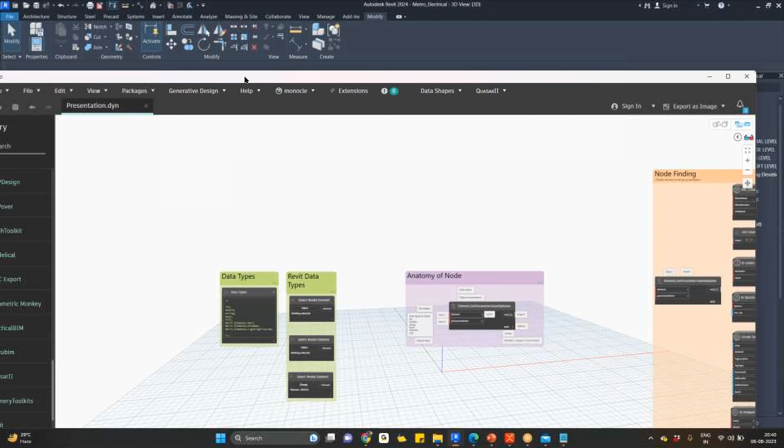This is the Dynamo interface. You don't need any external installation. Whenever you install Revit, it comes with the Revit installation.

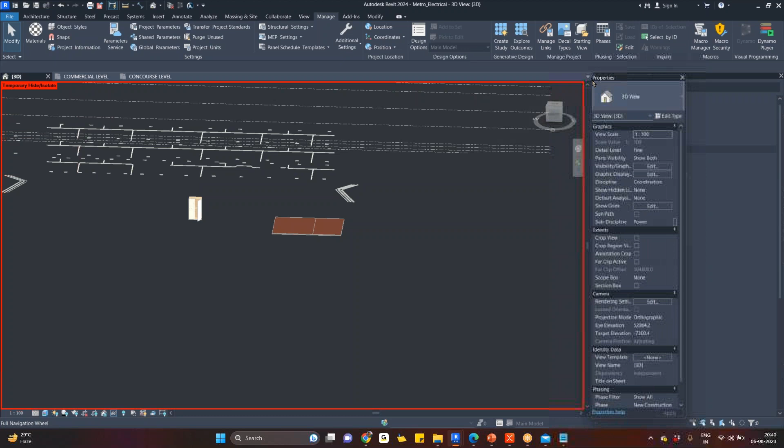You don't need any... okay, fine, let it sit here. Let that sit here. Let me drag that here. Let's come in.

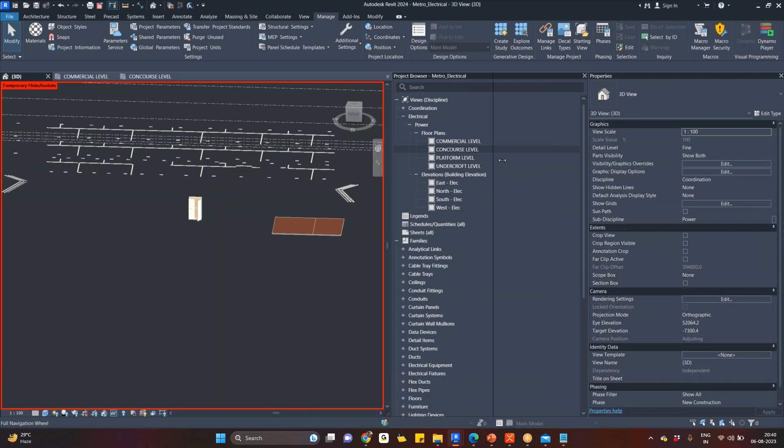So that's there in the manage tab, in the visual programming panel. We have a programming panel also that's called macros. Generally we call it macros, but in terms of coding, for the developers, it is programming. This is programming and this is visual program. There is a difference.

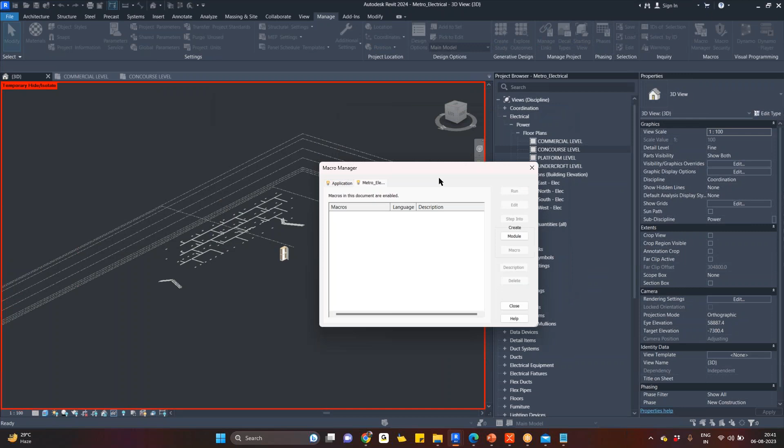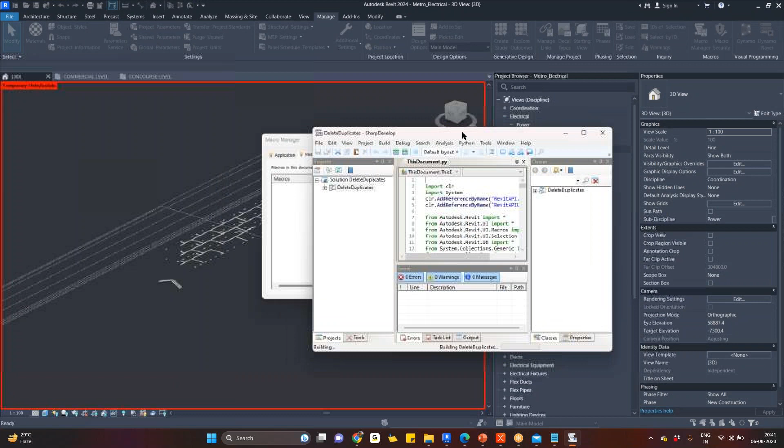When I click on macro manager, a pop-up comes, and when I click on create module, it asks, if you're a programmer, which language do you wish to go with? I can say I know Python because Python is a very easy language. Let's say I want to delete all the duplicates which are overlapping each other, so I'd write 'delete duplicates' and a description. Click OK. Now it opens another hidden application, which has opened in another screen. Let me drag that - this is the one, like SharpDevelop.

So if I want to write any code, I can write it. My content is like 'delete duplicates'. If I don't know how to write, I can use ChatGPT, like OpenAI artificial intelligence. I'll ask ChatGPT: act as a Revit C# add-in developer, I need a code to delete the duplicate elements like lighting fixtures. I just want to check - by mistake I copy pasted in the same locations, but I don't know how to delete those. Could you please help me?

So there are some ways to ask, in a very polite way, or else very angrily - you can ask anything. There are different tones to ask, different ways to ask. If you ask in the right way, it will definitely give you the right code. Or else, if it's giving you the logic, you have to customize here and there and get that done. So this is for the programmers.

But when it comes to the engineering field, if you're a BIM modeler or coordinator or BIM designer or Revit user or just a designer, you don't have any coding experience. That's the reason Autodesk had the idea to release visual programming - this is a programming to play with the macros. You need some language, but even though you don't know any coding background, at least knowledge, still you can play with the tool and automate something. It's called Dynamo, simply put.

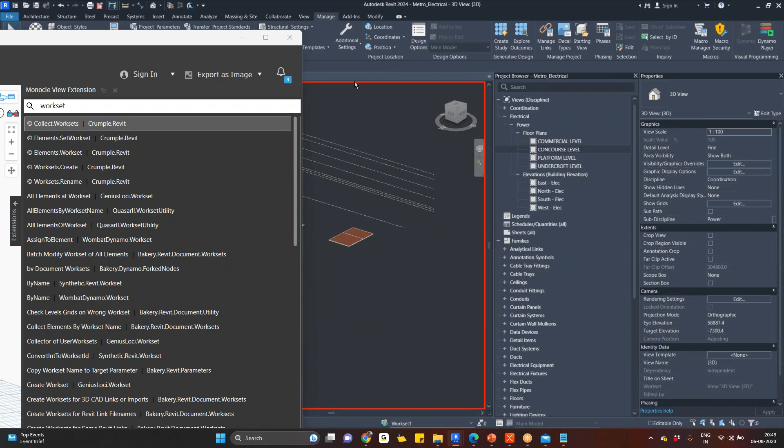So this box is saying it's like workset one, shared levels and grids. So here, era walls, it is a name. Era lighting fixtures, it is a name, but these are not the names here.

Autodesk dot Revit dot DB dot workset dot, okay so what are all those? It's called dot notation. I'm going to explain you in today's session what dot notation is. It's a very, very important concept to learn and understand.

Erase all the drawings, let's say okay I'm done with this. Collect worksets, no, whatever, element dot set workset. So what it does, if I get some elements and connect the workset to it, all the elements which I've connected to this workset will be applied successfully.

So for example, if there are any ducts, I can get the ducts and connect them to the duct workset. If I have any walls, get all the elements and connect this to this, and select the workset and connect this to this. So all the elements will be set to this particular workset.

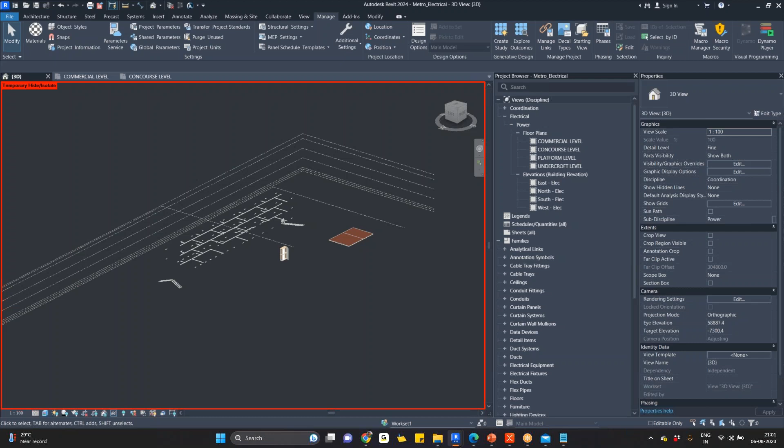If you notice this green color text, the green color one with a plus symbol, the zap symbol, and the question mark next to it, we don't have any methods over there, any actions over there.

Creation and a query. Creation and query. Go whatever, like creation, action, and query. So these nodes will help you to create something.

If you don't have anything in the model, and if you want to create, like I want to create a loft, I want to revolve something, I want to create a union, or else, okay, I want to create a sphere, I know some sort of points.

So when I hover the cursor on it, next to the text, a pop-up shows, saying 'fit a sphere as close as possible to the input points.' If you connect any points to it, it will understand and create a sphere.

Simple, by center point and radius. If you connect a center point, and give the point information and the radius, it will create a sphere again. Okay, so by 4 points, if you connect 4 points, it will create a sphere. So this is how it is exactly working. It is creating something.

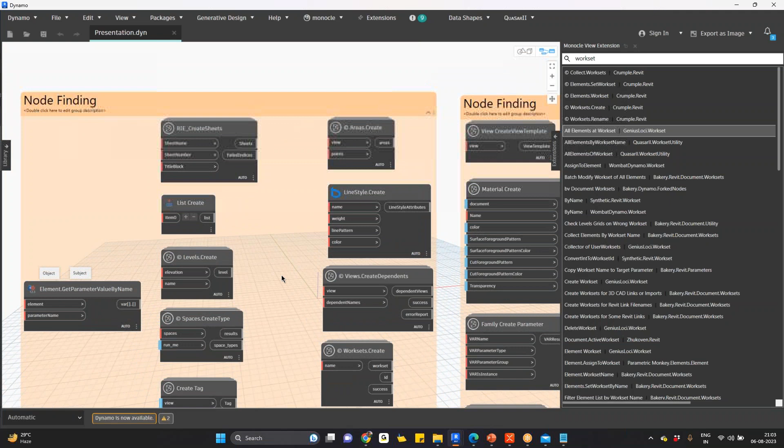Okay, so the node finding. Here we have a dot, here we have a dot, but here we don't have a dot. Here I don't have a dot. Here I don't have a dot. Here I don't have a dot.

There are few methods. So if you are asking something by putting a dot next to it, which won't work at all. So there are four more different strategies to get the nodes exactly you're asking for. Those four you'll be learning in the training part. This is the first node finding.

So once you find the node successfully, this is the easiest concept, to be frank. But when it comes to connecting the inputs, here - this has two inputs, this has three inputs, this has only one input. Very clear, these have two inputs. Oh my goodness, 1, 2, 3, 4, 5, 6, 7, 8 inputs.

If you connect something wrong, one input wrong, then this node won't work. What does it mean? Even though you have that node in your script, if you don't know how to connect the right inputs, what is the use of having those nodes in your Dynamo? Understand, connecting the inputs is really, really important. So how do you exactly connect all the inputs?

Very important stuff to understand - you have to go through the data types concept. Any input that is expecting something won't go beyond this: either it is expecting an integer, either it is expecting a double, either it is expecting a string or boolean or null, or any element, whether it's a wall or windows or lighting fixtures - it could be anything. It is expecting something, and these are called data types.

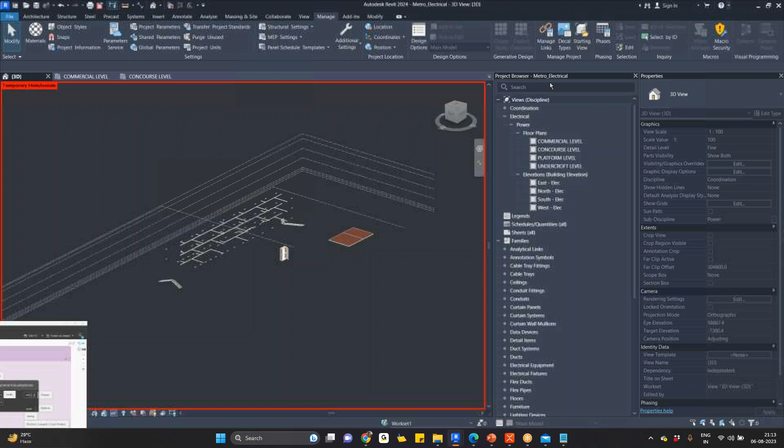Oh, so it's expecting an element. No, let me connect an element. Let me connect an element and select the model element, and get the cable tray, and I want to get the length information - length. Okay, what happened? So that is a string - no, let me type a string, my second hint. I'll type 'length' and connect this to this.

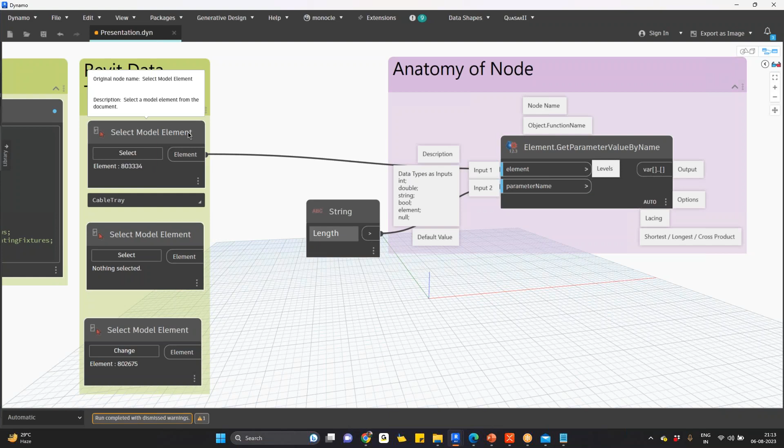So it's giving you 4760. If I want to get n number of elements, I'll connect select - I mean this is singular, I'll use select model elements instead. I have another node called select model elements, so I can select n number of elements and connect the elements to this node here. Simple. So this is the way you're supposed to understand the inputs.

There are n number of inputs again here. Oh, it's asking for a view. It's asking an element - what is that element? Oh, so in which view do you want me to tag? What are the elements to be tagged? So where are the tag locations? You have to get the points. Here, the logic is I know the element, but I don't know the points - how to get the point.

Very easy, for example. I have an element here - I have a light, I have another light here, and another light here. So by using some techniques, I'll get the center point of each and every light. Now to place the tag, I need a y value like 100, and from here to here, the x value again 100, minus 100, and again 100, minus 100, 100 minus 100. So now I want to create a point here.

So by using some nodes, I'll create a dummy point, and these points are going to be connected to this tag location. Simple. So you should know how to create the tag points from the base of this center point.

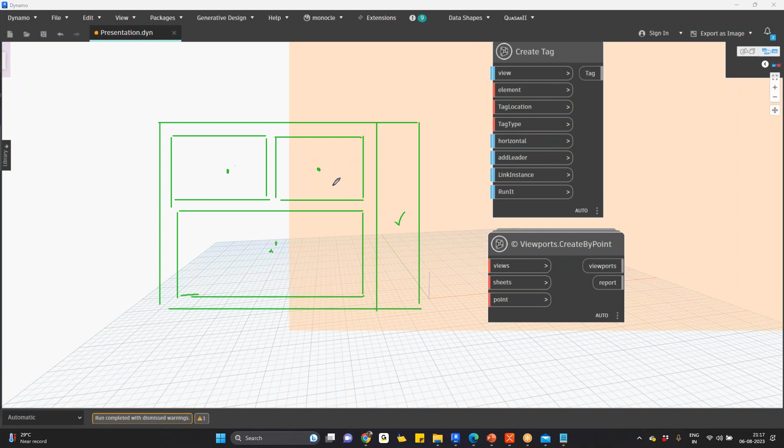So how do you create these center points? There are different strategies you can use to place the points and connect those points. Connect these 3 points to this, connect the 10 sheets to this, and connect the 30 views to this. Simple - it will place the viewports for everything.

Worksets.create, Views.create dependents. So when you connect a view and dependent names, how many dependent views do you need, and what are the names of it? If you want to create a line style, each and every input which is expecting, it is very clear.

I mean, if you understand in a kid's mindset, not like an engineer. If you're learning any tool, you should act like a kid, because everything should look new to you. We especially train people like spoon feeding - until you understand the concept, we don't leave you. Learning should be like a highway, not like a dirt road, not clumsy.

Now the node finding, and the dot notation concept. What do you mean by dot notation? Element.type name, element.get type, element.get type, element.element type, element dot.

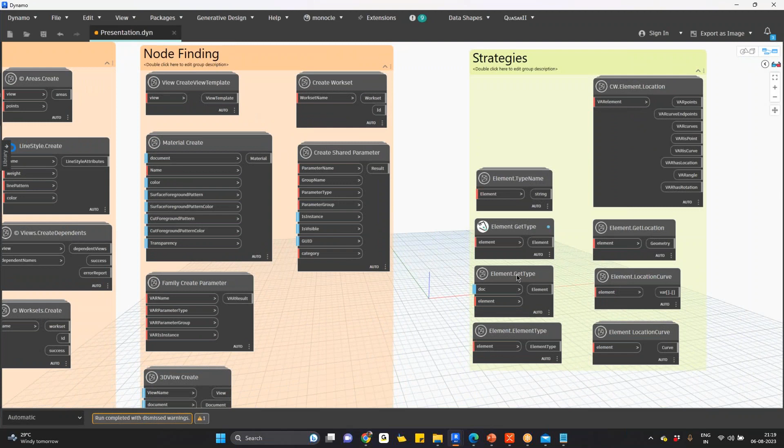So what is this? If I connect any element to this, it will return the type name. If I connect the element to this, it gives you the type name. It means for every single node, we have at least an alternative node - alternative nodes.

In the node finding concept itself, we have different ways of finding nodes, and there is a process called alternative node finding. Once you start finding, you understand what the data types are, and you understand the node behaviors - node states, I'll explain you.

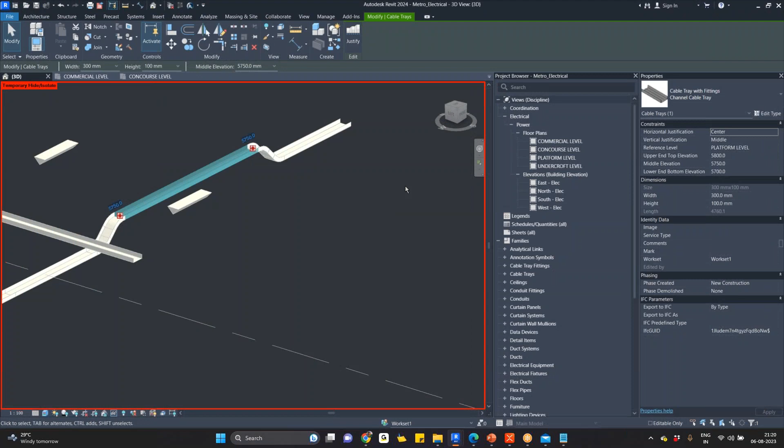The dot notation is nothing but - most people get confused. So when I select a model element, select the tray, Object.Type. Let me connect this to this.

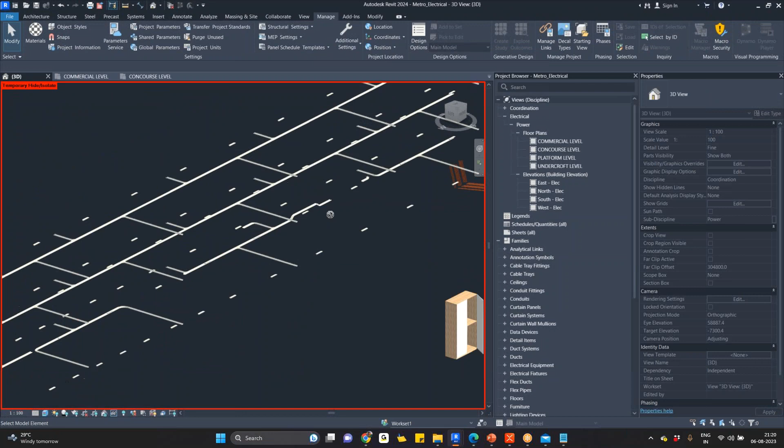It is saying Revit.elements.unknown element. Oh, is it? Select model element. Let me select - Revit.elements.floor. Okay, now it's saying Revit.elements.floor. Is it? Let me draw a wall, select the model element and connect this to this - Revit.elements.wall.

So the dot is nothing but - I have a dot here, another dot here, I'll be having another dot next to it, and another dot next to it. So what is this called? The dot notation strategy - dot notation strategy.

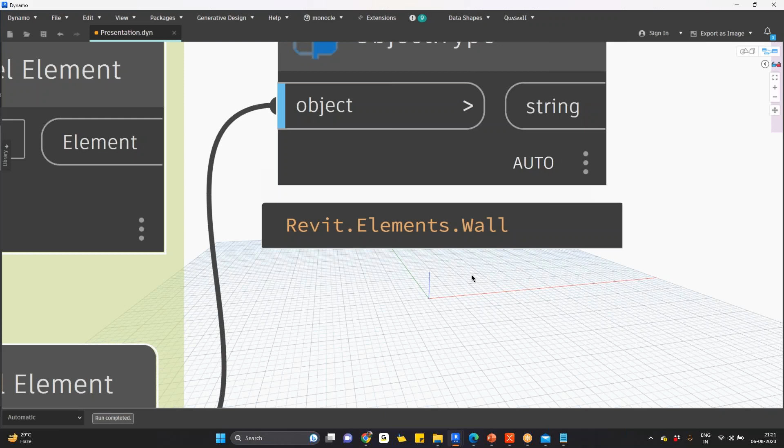Dot notation is a very important concept, and all the concepts I'm explaining here in just 30 minutes - node finding, data types, and some other stuff - each concept actually needs 2 hours to explain properly. In just 1 or 1.5 hours, you can't understand the entire secrets behind Dynamo.

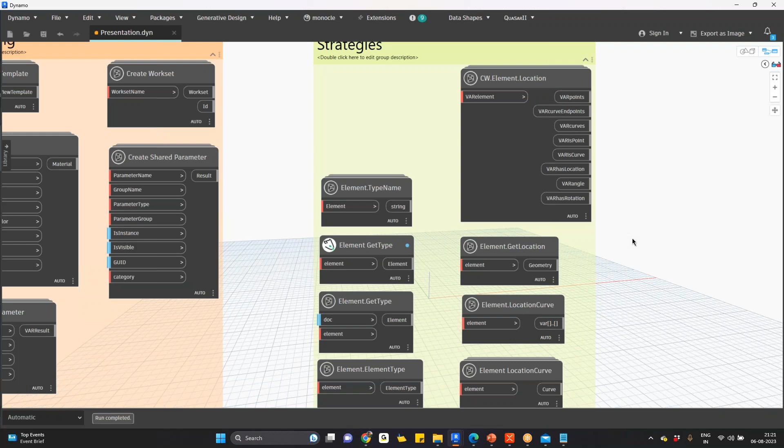But I just want to explain you everything, what you have and how to start yourself with the basic understanding. Well, the dot notation - these are like alternative node finding. If you have something, let me mute everyone.

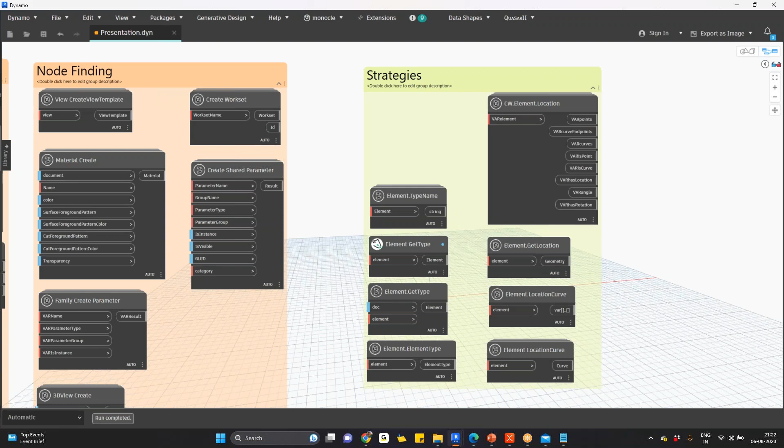If you already have some x information in it, but you want to extract some of it, like 1 of x, 2 of x, 3 of x, or 4 of x, you have to go in detail.

In that case, I will be using a dot notation strategy. Let me show you a simple Revit API model, like a language model API. Someone asked me just 30 minutes ago, what is a Revit API? API stands for application programming interface. For this Revit application, there is a programming interface, not the front face. So what we are playing with is a UI, user interface.

We are playing with a Revit UI, but the developers play with a Revit API, application programming interface. Our UI is completely different, and their UI is completely different. It's not called UI - they don't have images, they can't see the lines, nothing. But still they can program something. So that is called Revit API. For us, it is a Revit UI. So you are Revit UI users, and now you are going to become a Revit API user.

I am using 2024. When I click on 2024, now it shows me the code, the entire code of Revit, to develop a Revit application.

If I dump all these namespaces into a single application, I will be the application developer for another application, something like Revit. I'll create something and write it. So I can create my own application and dump all the code into that. And I have another application, similar to cloning - I can clone the same Revit application and name it something else. Understand?

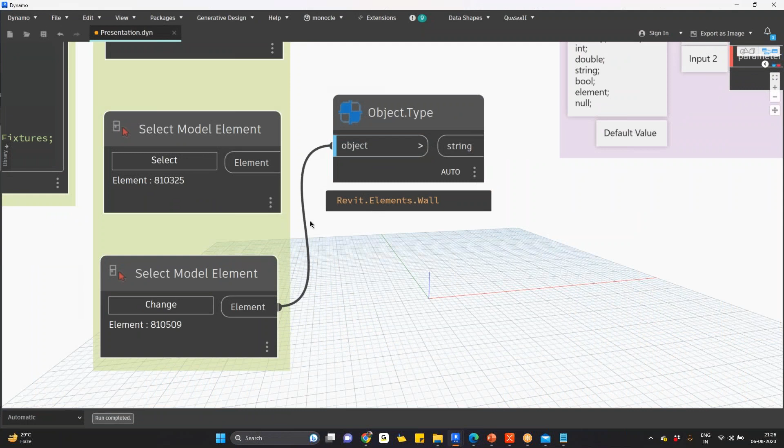Element class - again, if I want to play with a cable tray class. When I click on a cable tray, where is it coming from? The Electrical namespace - it means they have segregated things. It's nothing but like Revit.Elements.Wall, coming from architectural stuff. Revit.Elements.Floor, also coming from architectural stuff.

When I connect this to this, it's coming from MEP stuff, and it shows as an unknown element. There is a reason why it shows unknown element - these inputs are called, I'm sorry, application specific data types. It is Revit data types.

Now I hope you understand every input. If they are not connected properly, that's fine. If you connect the right inputs, it returns the actual value. If not, it is expecting something and you couldn't understand properly, and when you connect something wrong, let me show you how it acts.

This is what - my name is a node. I have a node called 'my name is a node', and that is expecting three different inputs. If you connect these three inputs in the right, correct way, it will work very, very perfectly. It's called an active node. So now let's see what it is saying.

I've been waiting for you to bring me gifts. Let's see what you are going to bring. Gifts are nothing but inputs, so it needs some help. What does it mean? It needs inputs. If you connect the right inputs, it's saying that you're a genius. You understand my inputs and connect them exactly as I was expecting. The node will be happy and it returns the right value, the right output as you are expecting. What if something is wrong? You understood like two inputs, and you didn't understand the third input.

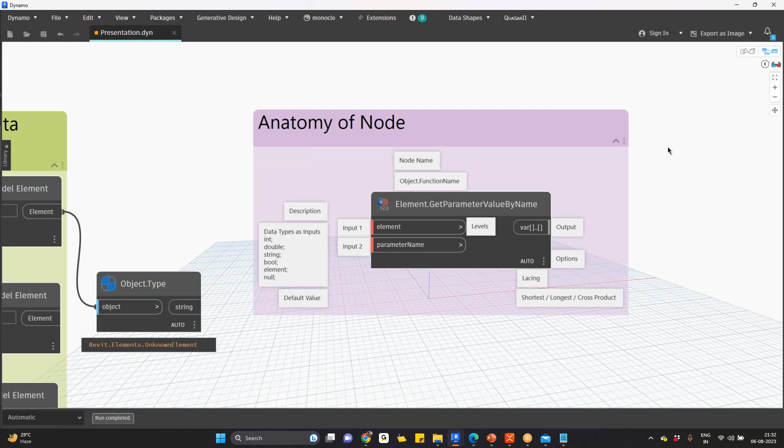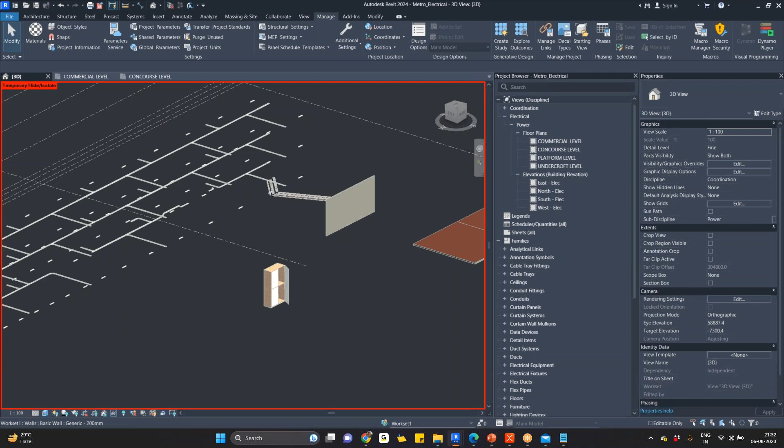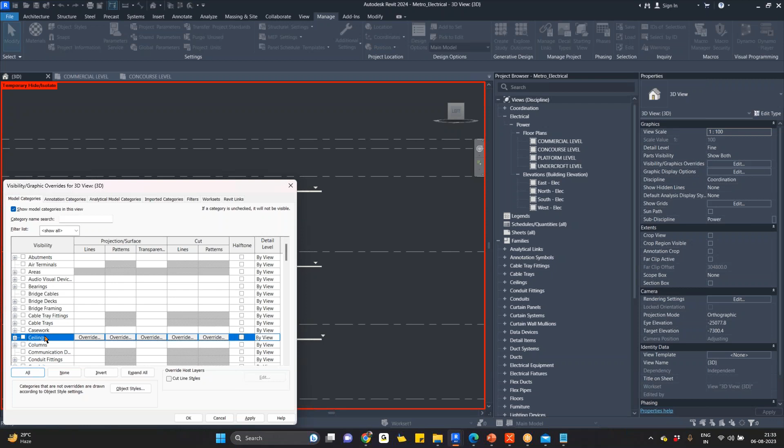Let me show you simply. I have placed three different nodes here, and I want to play with Select Model Elements. Let me see what's happening—I'm expecting to see something here. Let me just get only the cable trays. I need only the cable trays. Select model elements—let me select only the cable trays. I selected all the cable trays here, so I'm just asking to select this.

I'm asking to get all the length information of this, a string, like what we have done before. Now I'm doing it with the number of elements. Sometimes what happens when I connect this to this—okay, fine. Huh, what's wrong?

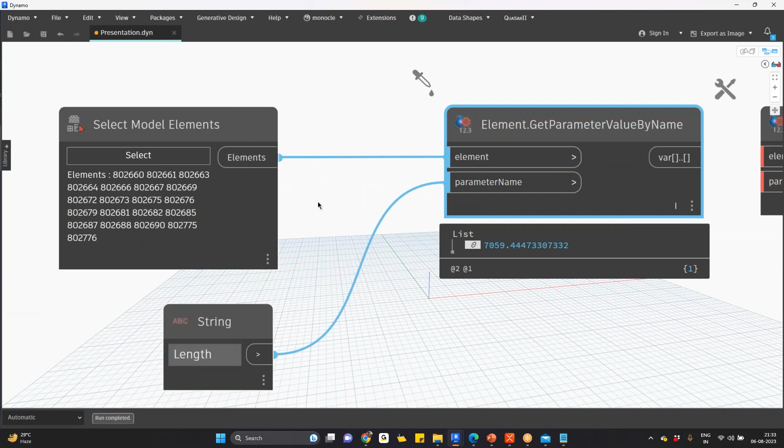I have 66 elements, and it's supposed to get 66 outputs, but it isn't returning that. I don't know the reason. Let me try with some other node. Oh, it got 66 items.

Very clear, even this is element.get parameter value by name, and this is also element.get parameter value by name. What's wrong here? When I connected the same thing, it showed only one output, but here it's showing 66 outputs. It means for all the elements, it's getting the length value, but not for the first one. Why?

This is called lacing. That's called lacing.

Lacing is one of the most dangerous concepts in the entire Dynamo. There's another one, like a villain. In every programming language, we have villains for sure. This lacing is one such villain. If you don't know how to handle him, your data will be gone, seriously gone. Your hero will be killed, just like how you're killing your own projects. So it will be exactly the same. He is the first villain.

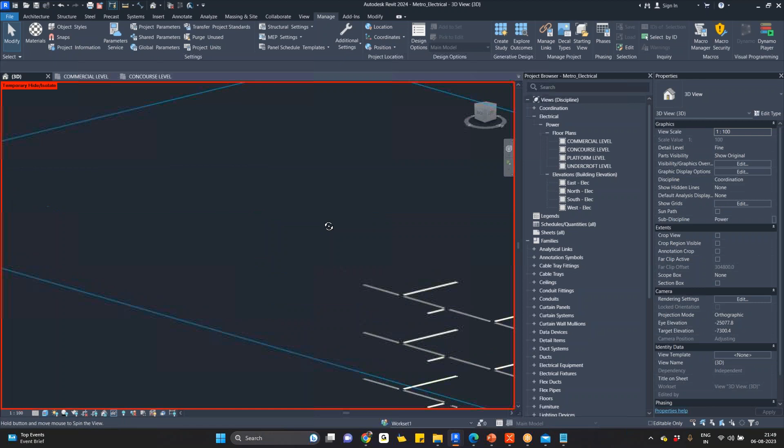Let me show you - select VB, select everything, I can see everything. Let's say select this light - select the light, oh very small light. So, very small light, and I'll say Snoop selection. This is the properties palette.

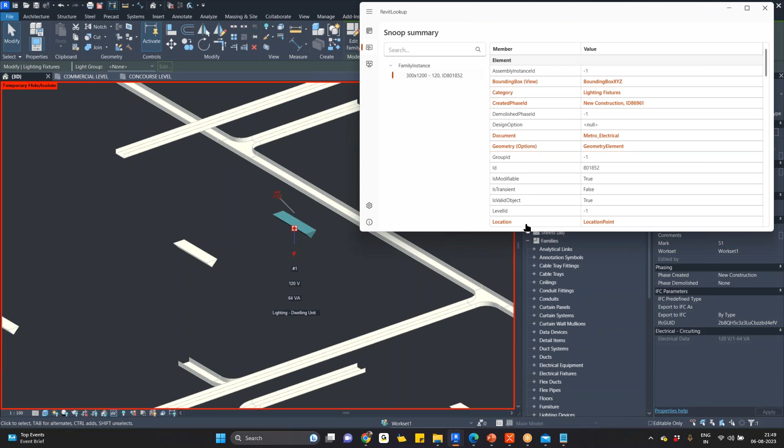Okay, now if I want to get the name of this, if I want to get the ID of this, let me give you the hint - element. In Dynamo, how we are using dot something, like element dot location. As I explained before, element dot location, element dot name, element dot something - the same thing is happening here.

Element dot ID, it returns this. If I'm asking element dot level ID, it will say at which level it is. Element dot location, it will give you the XYZ values. When I hit enter and look into this, I have an XYZ value information here. So element dot name, oh this is like 300 into 1200 into 120.

I can see the properties palette - okay, this is the family instance, and this is the ID of it, 801852. Where is the ID? 801852. So element dot parameters.

When I put a dot next to the element and type parameters, it will give you the parameter information. So, is the element pinned? No, not pinned. Is that element able to be logged? Yes. Has it been assigned with something? Yes. So which is the work set here? Every single piece of information I have here.

Not only this, even this has around 50 extra parameters maybe. Then you said we only have 5. No, this is not the complete data.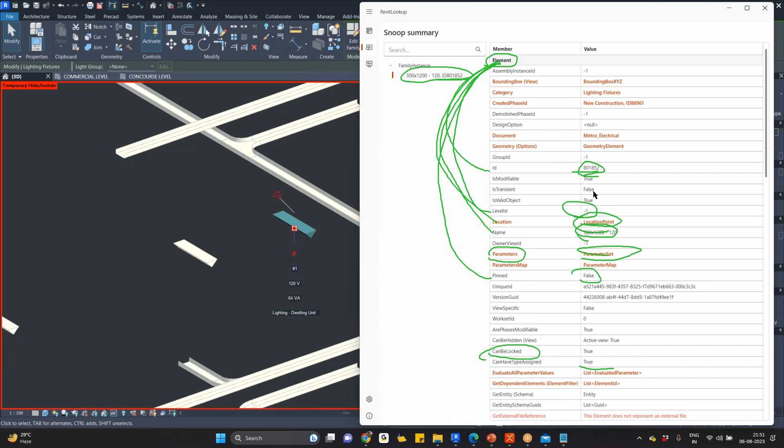For example, location point. I can see the X value, Y value, and the Z value. And this is in rotation degrees, like 3.14. Okay, let me close this.

Parameters. When I click on these, I have an area parameter, I have a category, I have a circuit number, I have comments. So you can see when I just click on the comments, you can see the value.

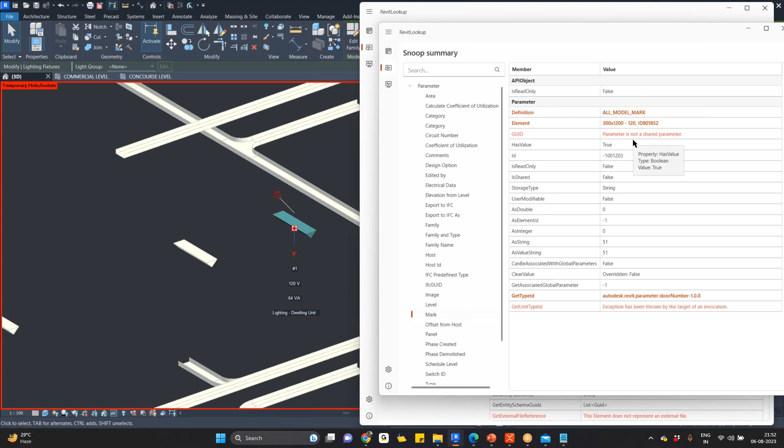What about mark? Yeah, when I click on mark, the value is 51. But the rest of the information you can't see. You can't see it in the Revit properties, either in type or instance. Okay, so this is the actual hidden information, and we are going to extract and play with it.

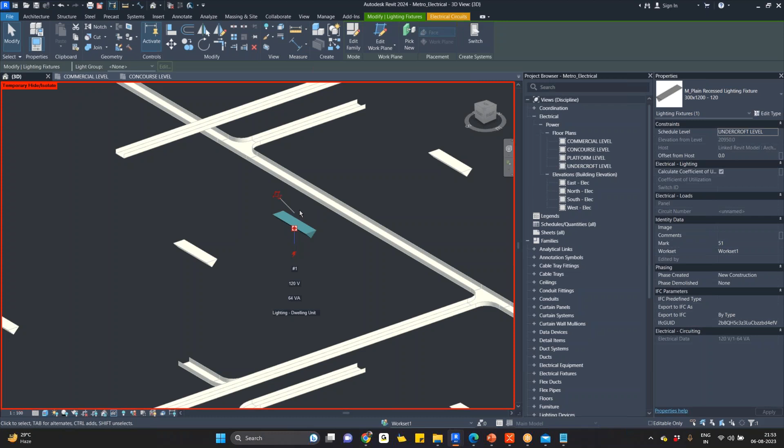If you can't find the sort of input, I mean the set of nodes, that you're actually looking for, then there is no other option, you have to come back to Revit, open that Snoop selection, and get the code. That's in the level 2, stage 2 training program, and then you will get it.

Node states. I already explained the node states, actually I'm in the middle of this. So freeze or preview, there are a few more states. If you download any scripts from somewhere, what happens? The nodes won't work, because you don't know there is a state called freeze or preview.

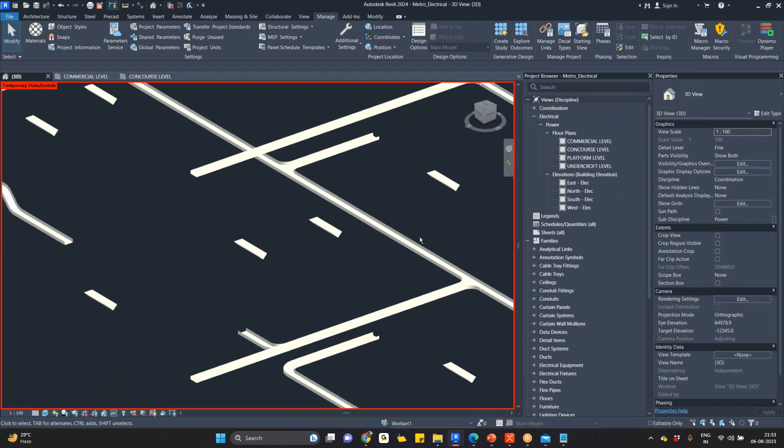If I play with something, it's giving you the value, no? Let me deselect this. I just freeze this. So when I'm trying to connect this to this, it's not returning anything.

You downloaded this script from an external website. When you try to play with it, it's not working. This is working, this is not working. Even this is working, but this node is not working. You don't know why this is in a different shade, why this still says function, because that's in the freeze state, or else it has to preview something, but you can't see the preview in Dynamo.

There are different states, so you have to understand those, and this is purely called an error. There are different kinds of errors, I can't explain everything in a single webinar. These are dangerous, you have to look into each and every aspect very clearly, and figure out why it isn't working, what the problem is, you have to fix it yourself.

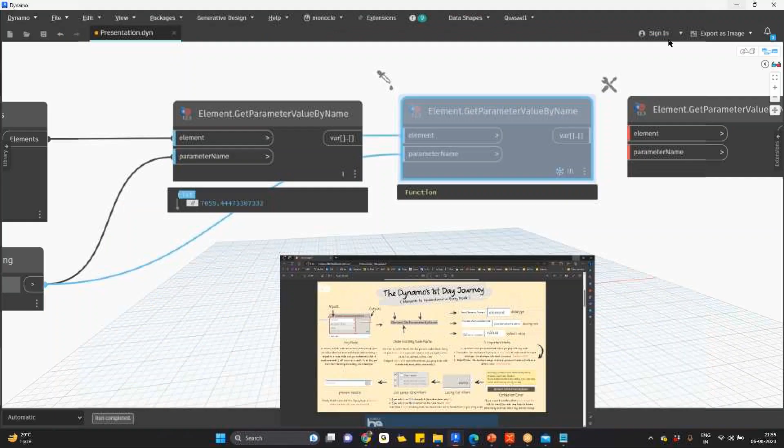Okay, fine, so I have explained almost everything, I am revealing everything here. Node states, custom node in the sense you can create your own nodes. You can create your own definitions like this. You can create something like sheets, you can create something like list create. You can create a different box of your own, in your name.

For example, Sushil dot levels dot create, Sushil dot spaces dot create type. For example, create tag, let's say Tarakram dot create tag, something like that. Before the node name, your name will be added before the function name, like viewports dot create by viewport, or Jishan dot create by point, something like that.

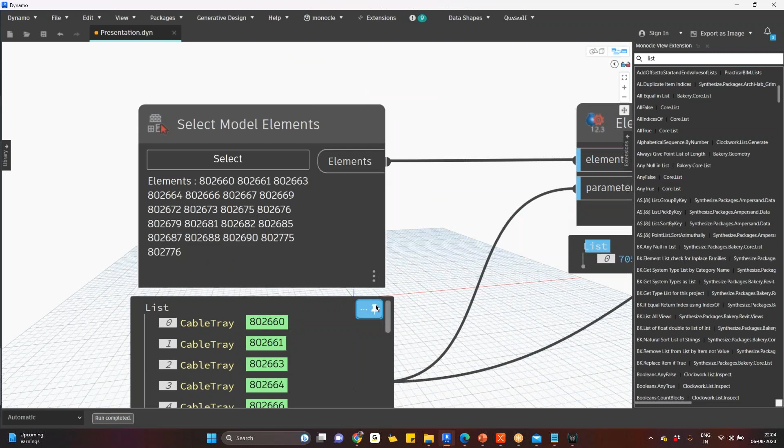For example, let me show you very basic stuff, the basic script of how filtering works. Select model elements. If I type something wrong here, it's not even showing me that. Select model elements because I'm already having the data here. Delete, I'm already having like 66 elements here.

So I want to play with this, all of these are like cable trays. I want to filter the trays by Get Parameter Value by Name. So elements and string, while typing the length information here.

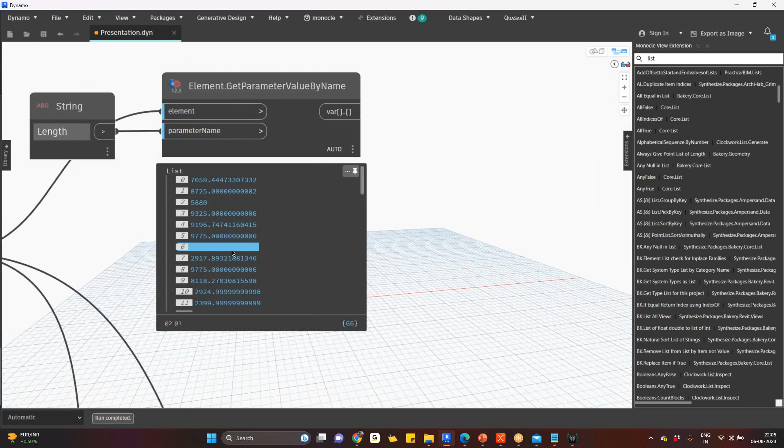So I don't want to play with all the cable trays. I want to play with only the cable trays which are bigger than 10,000, the value bigger than 10,000. So I will be using a set of functions like math operators or something. Just give me a minute.

Okay, so when I connect the data to this, now I want to check with the number. So that is a number format. I'll type number here, and I'm asking about 10,000. So now it is cross-checking. I'm having a list of numbers, so every single number it will check like this.

Let me check one. Now it is cross-checking. In the list, the first number is 7059. Is 7059 bigger than 10,000? No. Is 8,725 bigger than 10,000? No. Is 5,888 bigger than 10,000? No. So instead of saying no, no, no, it returns false. False is nothing but no, and yes is nothing but true. So the sixth index value returns true.

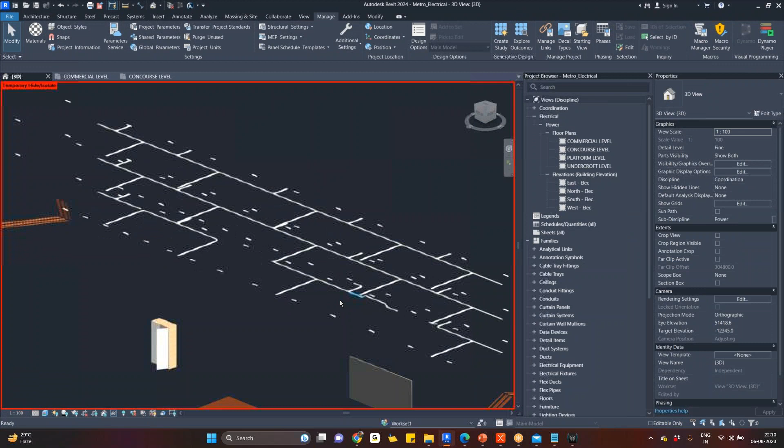For example, these elements, I want to see that in a red color. Color dot red. Then I can go and see the trays that are in a red color. Notice that? Did you notice that? So the rest of the elements should be in a cyan color or something.

So I will be playing with it. Control C, Control V. I want to play with this and the color, something like color dot green. Let me cut this to this. Rest of all the elements are in a green color. Is this clear?

So this process is called just filtering, and we have n number of strategies. I mean, if I give you the same task, Sushil will do it in another way, Said will do it another way, Thiru will do it another way, Vijay will do it another way. There are n number of strategies. This is not constant. I'm not saying you can only do this in this way, you can do it in your own ways.

So I used math function operators. What if I want to do that in a coding part? I can do it in a very different process. Let me type elm dot get. Don't get panic again now.

This is called design scripting. What you're going to learn in level one, in the stage one training, you're going to learn even this. Okay, this is not Python, this is not C sharp, this is not any programming language. It is especially designed for Revit and Dynamo. It's called design scripting.

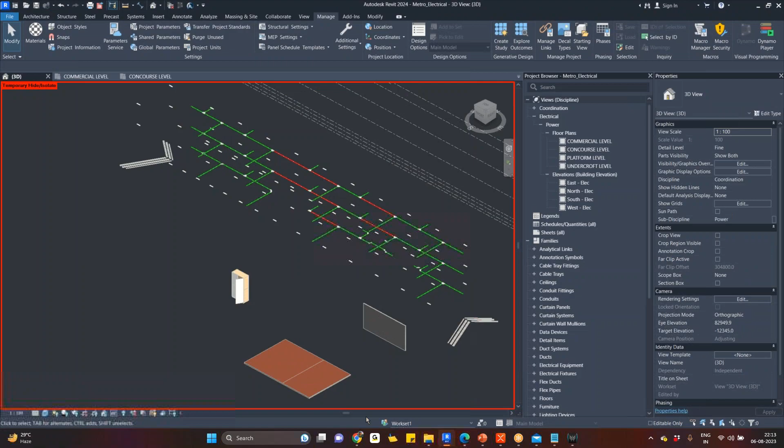Okay, the same filtering concept. Actually, where is the other one? This is another key, this is not a key concept, it is an additional option. Okay, this is really important guys, because before you enter into, in the stage when you're going to see the Dynamo and the design scripting, and in level two...

Dynamo is a no-code platform where you don't write a single line of code. In the same set of the level one training, there is design scripting. So it is a half-code process. It's not a full code. It is not a full code.

Okay, let me ask the same thing to ChatGPT, how the Python code looks like. So now I'm asking, see that carefully: act as a Revit, Revit Python developer. Earlier it was like a Dynamo developer. See, earlier it was like a Dynamo developer, but now I'm asking act as a Python developer. Python developer, okay, now comma.

I'm asking very clearly, like I'm having a set of list of cable trays, and I want to filter the cable trays. I'm sorry, stop generating, let me edit that in full. I want to filter the cable trays which are bigger than 10,000 length.